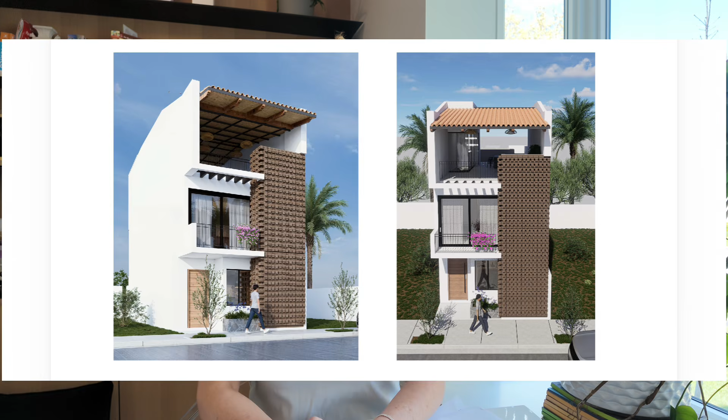What we're building is going to be a house. It is 2 stories plus a rooftop. In the 2 stories, we're hopeful for 3 bedrooms, and then on the rooftop we'd have a small dipping pool, kitchen, and a lounge area.

Because of the size of the lot and the configuration, the staircase had to be carefully placed in order to, one, fit the rise and the run, but also to incorporate a swimming pool.

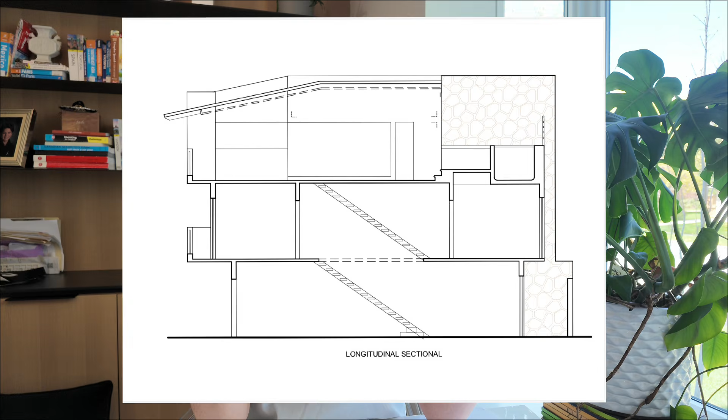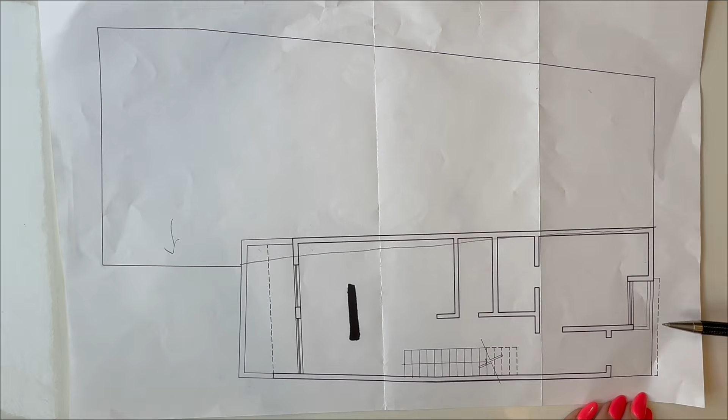Our limitations are light from the front and light from the back. So you have sun in the morning on the front - your front patio here would have sun - and then as the day progresses, you're going to have sun that comes here, and you're going to have a beautiful sunset in the evening.

Here we are on the ground floor. We have our entrance here, this is our sidewalk. What I like about this entrance is that it's not directly on the sidewalk, it's off of the sidewalk, so you'll have an overhead here. Then coming into the hallway, there is the staircase, but in order to get up the staircase, you're actually going to come up this way.

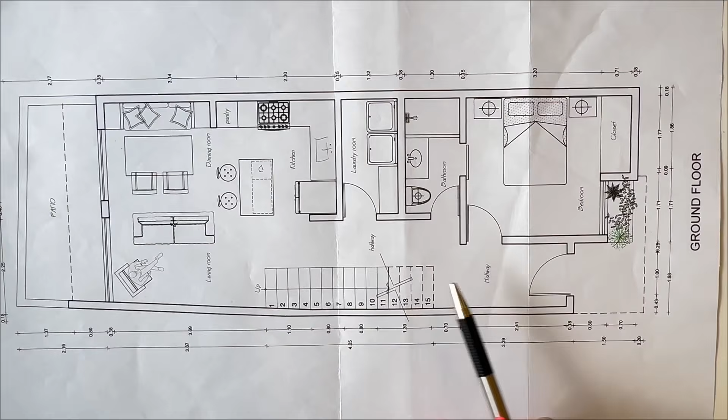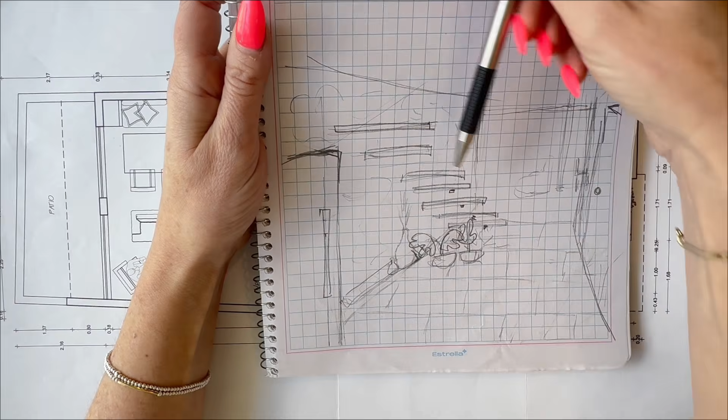So you see the back of the staircase, which we're planning on having as an open tread staircase. I have a little mock-up of this hallway I'll share - I'm not an artist, although I love to pretend that I am. This is the door opening, and then we're going to have some nice large tile with small grout lines, a small floating concrete bench for setting vases or plant life on, with integrated LED lights that come from the top of the floating staircase.

It would have a stringer just for support and also safety, but integrated electrical so that the lights can shine down onto the plant life here. There's a wall that comes out, so once you get beyond the staircase, there's a little bit more space to get into the apartment. I think this is a nice welcoming look.

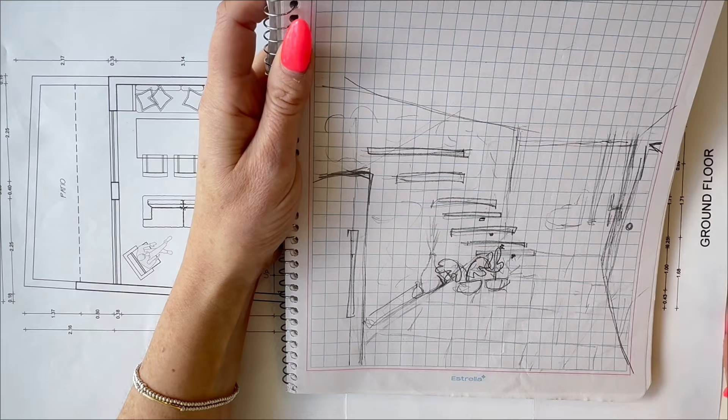We're going to go into this room here, which we've labeled bedroom. For resale value, I think having a third bedroom is valuable, but how we might use this space, we would have it as more of an office with a Murphy bed. So that bed would be attached into the wall and could come down in whatever size. I think this is a queen size that could fit, maybe it's a double. Maybe I would have a desk here that has a nice view out the window.

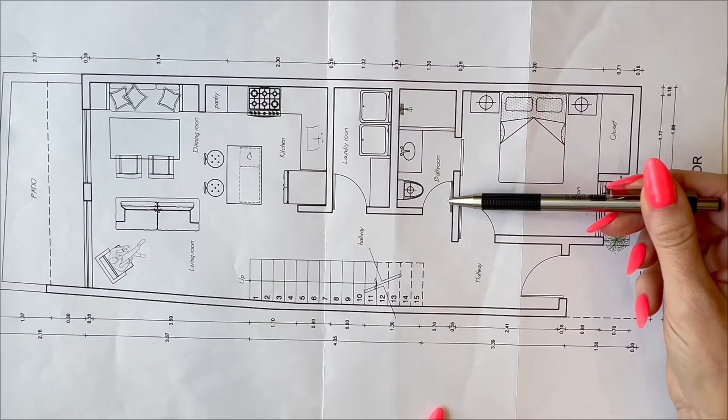But also really accessible to come and go as we build the next property or whatever project it is that I'm working on. So we've added a cheater door here, but made this into a sliding door. I think that will work nicely for the entire floor, but also feel somewhat private if there are guests staying here. I like the size of this bathroom, but I think that's a perfectly useful bathroom, nice vanity size.

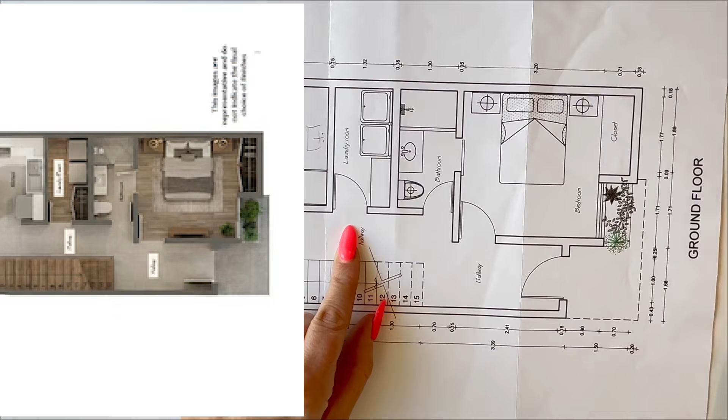You have a nice closet here. I think that's a really good closet size. So then when you're coming out, you'll see that the space under the stairs goes out, so you have more space to go around the stairs. Our laundry area we wanted to have on the ground floor here, a regular sized washer and dryer, and then some storage.

So if we walk more in here, we have the kitchen, dining, and living room, and two full size, as large as we can get into the space, sliding doors. Because we need as much light coming into the space, you're going to have late afternoon sun. It will be lovely to sit out on this patio out here, which we'll get to.

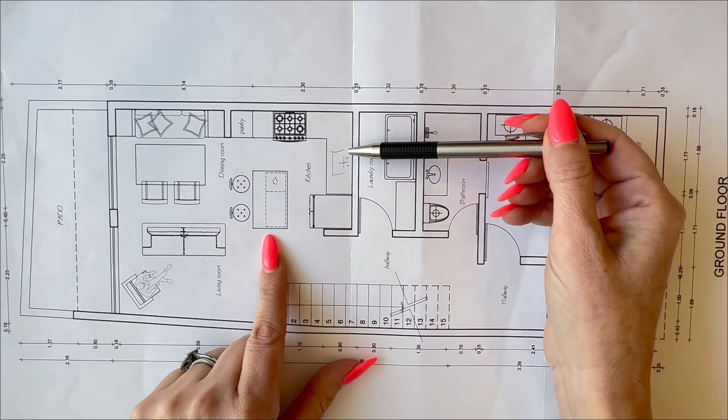So the kitchen, I think, is small but mighty. So we have an island. Most likely the sink will be here, the dishwasher here, fridge, stove, pantry, and then this will be cabinetry, a sitting space for at least two, possibly more. And then we go into the dining area, a tight space to be able to fit potentially six people.

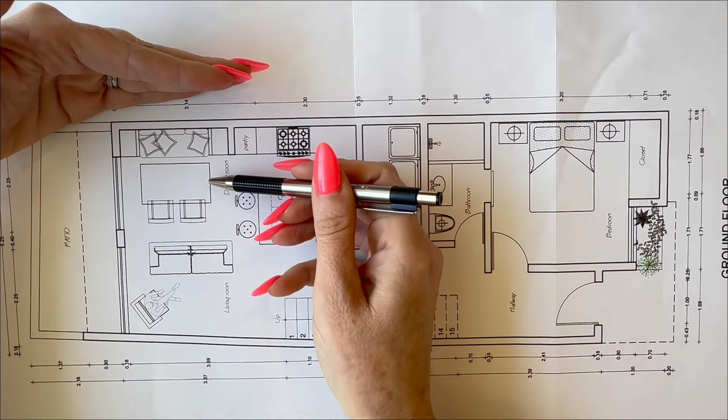What I've suggested is a banquette, so that pushes the space out so that you can have more room for the chairs and the table. So it just gives you a little bit more square feet. So you'd move that space over, which gives you then more space into the living room, and I'll show you what I've come up with.

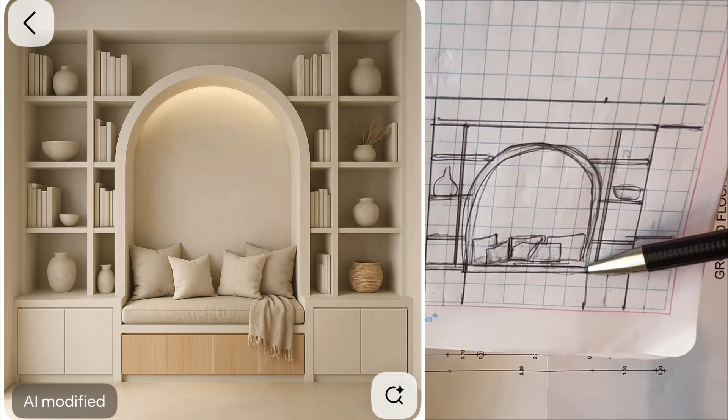I like this inset rounded arch. This is the banquette with a pillow on the seat, but also nice pillow features. This would double as also shelving. I'm a really big fan of decorating with items that are also useful. Things like a salad bowl that wouldn't fit in a cupboard, you would put on the shelving, or a vase that you would take off the counter and actually put your flowers in when you have fresh cut flowers.

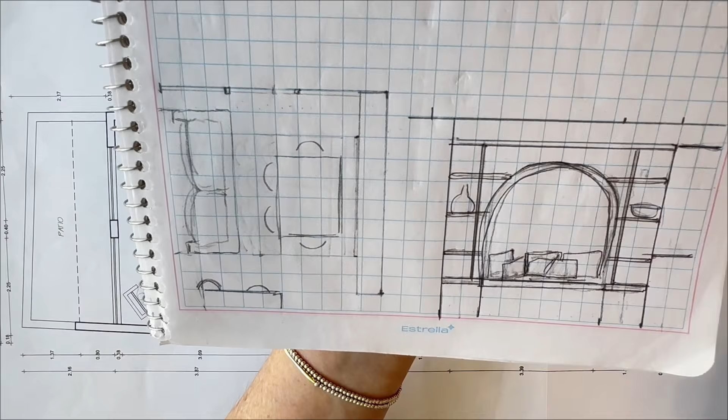This brings the table over, which then gives you more walking space between your couch and your island. This pinch point becomes a little bit better. In the living room, most likely the TV will be on this wall, attached to the wall somehow, some way.

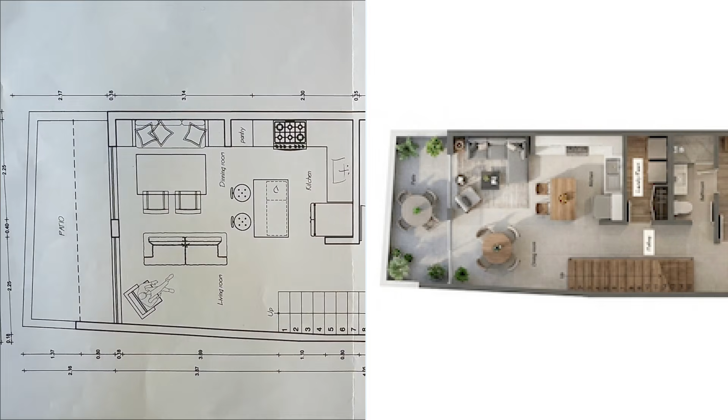So then we're going to be opening up these doors wide, where you're going to have a nice breeze coming in, that later day sun. And this terrace is going to be absolutely beautiful. The plan here is to try and incorporate a water feature, some brick interlock that comes out, a nice seating area, and it's just going to be quiet, serene.

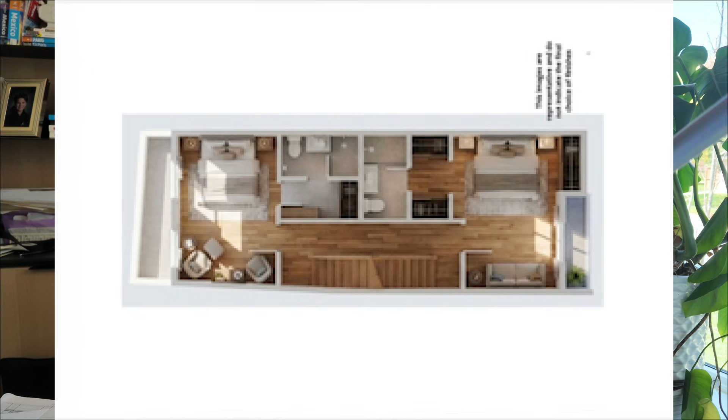Let's go to the second floor. From the ground level, you're going to be coming up this way. I'm thinking that this is going to be my primary suite, and here's why. Tell me in the comments if you think the back unit should be the primary suite or the front.

We go into the bedroom here. I'm a TV in bed kind of person, so this wall has to have a TV. There's a very large sliding door, and then this is a patio. I'm a slow kind of morning person, especially in Mexico, and I want to be able to have my coffee on that patio with the sunlight coming in.

There's a closet space here, in the nook of the front, so you have extra closet space that could just be locked. You have the bedroom with the integrated side tables, which I'll show you, and closets on both sides, so it's a walk-through. You could have access to the entire closet, or you could have an entire side of that just locked completely with your things in it, which is most likely how we will be doing it, keeping things down there.

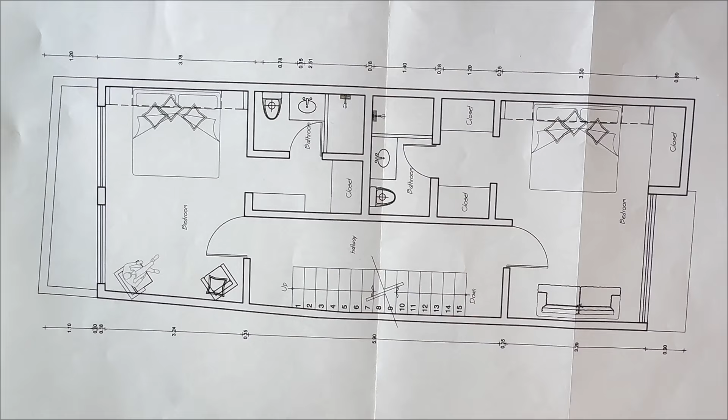The bathroom is about the same size as the one downstairs, slightly bigger. The vanity is going to have to do double duty, where it has a lockable space but also quite a bit of storage, because you need to fit towels, toiletry items, hair dryers, all that stuff.

We'll go into this design here. If you remember the banquette from downstairs, I have the same feel for the bedroom, so you have a rounded arch with an integrated headboard and side tables. The floating side tables, I think, work better than having drawers here. I like the idea of it being open so you can vacuum and clean nicely under it, and you have just what you need on top.

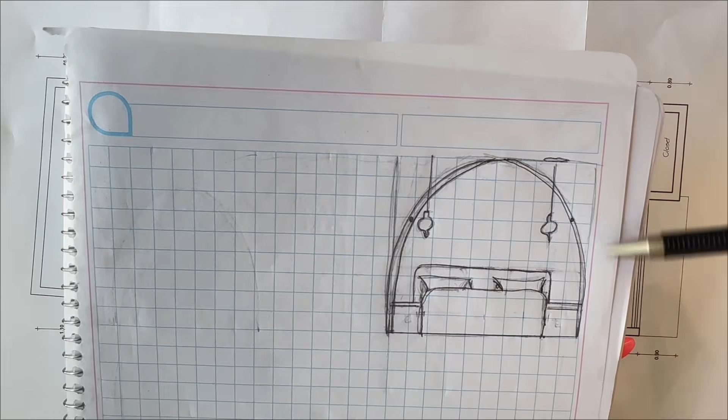Because this is an integrated arch, I'd like to see if we can add electrical pot lights with a light switch down here so it could be a reading light. These more decorative ones are beautiful, antique-looking glass blown lights. That gives you a little more space in a small area that you're building it into, without adding large, big furniture into the room.

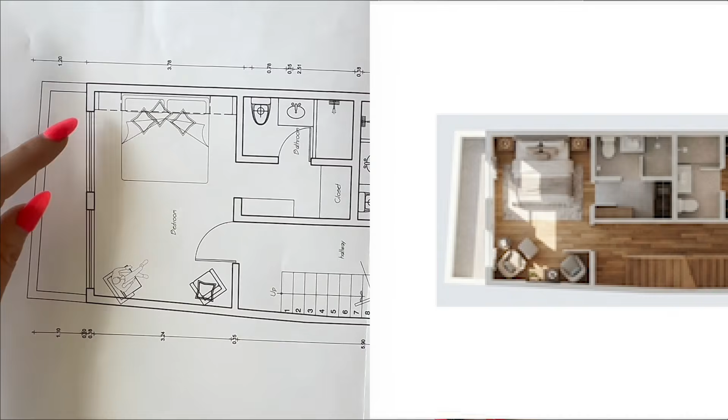So we're going to come out, walk down this hallway, and see the other primary suite, okay? Tell me which one you like better. You'd have your TV on here. You do have more doors, so you'll have two large sliding doors, unless one of them is fixed to save on cost—that's definitely a possibility also.

This is not a patio, so this would be a Juliet balcony that would look down into the terrace. Do you remember that terrace, the ground below? Beautiful, serene patio—that's what you would be looking at down below.

And then you have a closet and bathroom here with lots of closet space, and also approximately the same size bathroom. Here's why I think I might end up with this room as my primary and not the other one: it would have later light in the day, and typically I'm up at the pool, or working, or out, but perhaps it's quieter here. This neighborhood is very quiet, but of course you do have some noise—street noise, people walking, cats and dogs and roosters and chickens and all that stuff that can bother you.

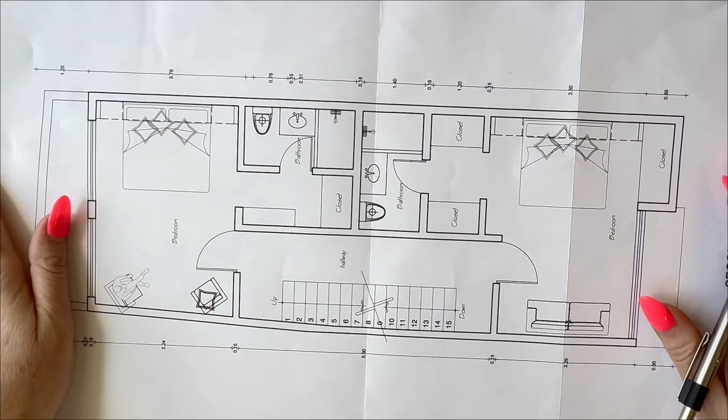So will the back side be more quiet? Is that something you're going to want to have? I wonder—one or two? Which one are you moving into?

Okay, here we are on the roof. We are surrounded on all sides, so there's no view with this house. The benefit of this house is that you're getting everything you'd want in a 3-bedroom condo, but it's your own—you get your own private pool, your own private rooftop, without an HOA to tell you what to do. You have control of your own expenses, your own privacy, and you're in the best neighborhood, in my opinion, in the entire world.

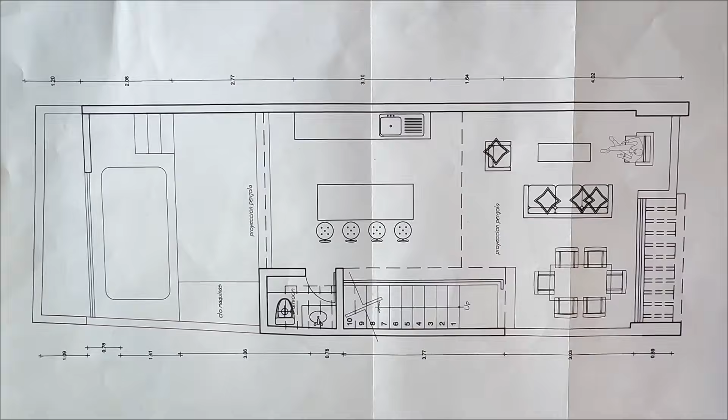So you're going to come up here, and there's a landing, and then there's a door. I've instructed the architect to change the kitchen to be over here and the island to be over here, leave the dining space, and have the lounge closer to the pool and the pool deck.

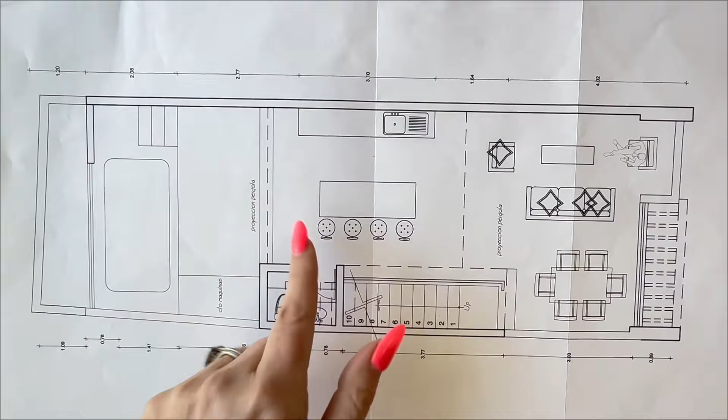Okay, so the top is going to be covered with a roof to here, and then the rest is open. This will be a pool deck that will be 2 stairs up, the kitchen being back here. So this is the roughest sketch you will ever see.

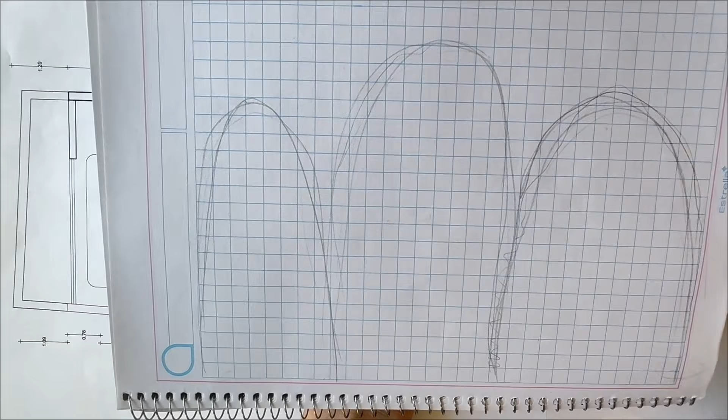Simple, plain. I like the idea of having 3 here behind your kitchen, and either tiled, like a tiled antique looking mirror, something like this, or large cut mirrors that maybe have a tile going along the outside, trimmed in it. This is something that I will work on.

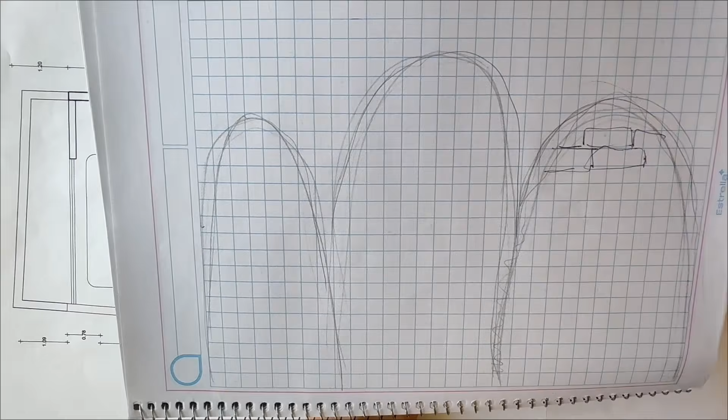So this is the 2-piece that will sit up on the rooftop here, just enough for you to get changed or have a quick wee before you're back in the pool. And then next to here is where the pool equipment would be.

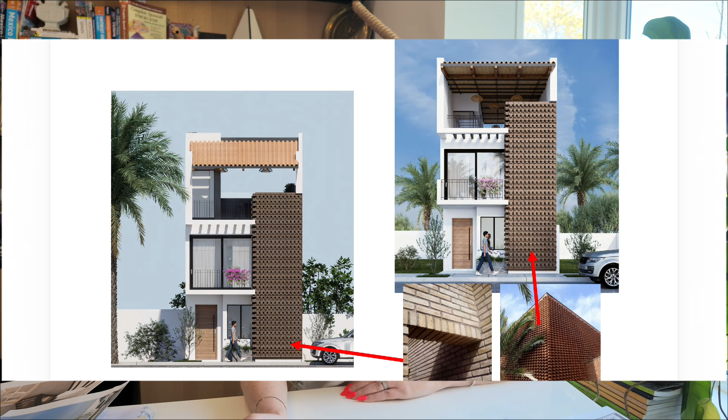That's the tour of the floor plans. Now let's go over the renderings. Here are our beautiful renderings. We would like the color to match the roof tile, but I just think that this is a beautiful representation of keeping true to the aesthetic of the neighborhood, also incorporating the local brick and of course the local tile.

Here you can see the offset of someone walking on the sidewalk and where the front door is located. Oftentimes when you're walking in Puerto Vallarta, you will see a door right on the sidewalk. Here it's shaded. If it's raining, you're covered.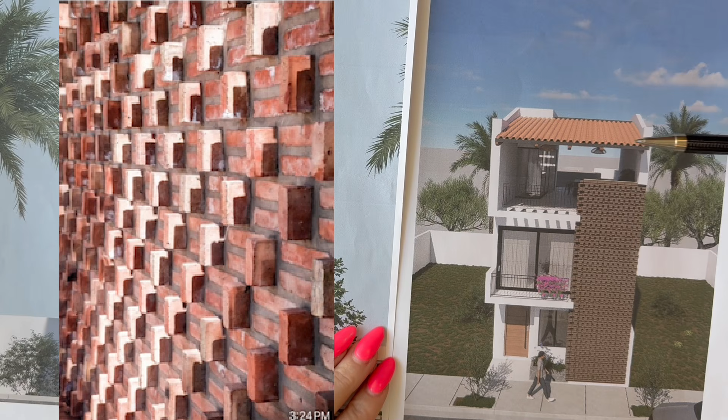This is a brick style pattern. I want that same brick to match the tile as close as possible with the lighter blonde, less red color. So I want to keep the traditional colors of the neighborhood, but bring that sort of modern twist into the hacienda style.

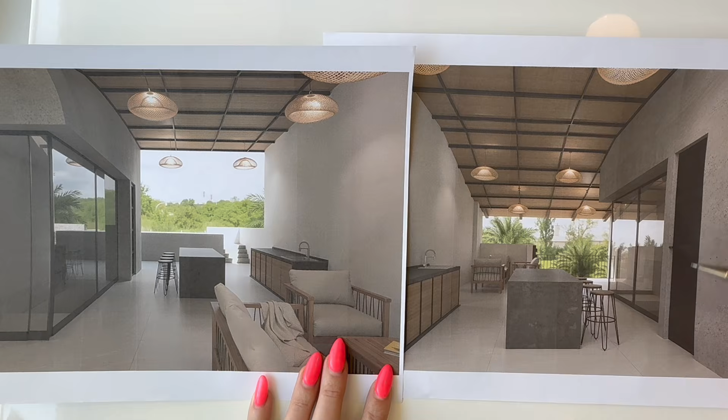Here's our rooftop, and it gives you a little bit better perspective of why I want to move the 2 rooms, the kitchen and the living room. The more time used would be lounging near the pool, so it would be a little bit more cozy in this area.

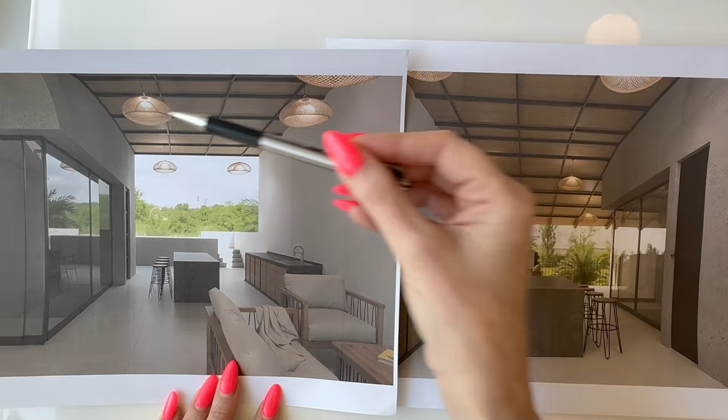And I do like the lights that they're implying with the renderings, but I would use them in more of a clustered artistic manner over top of a seating area. You don't have that height definition with the actual plans, because what I had them change is that you're actually going to, before the pool, walk up onto a deck, 2 stairs, which then you don't have the full step of getting into the pool.

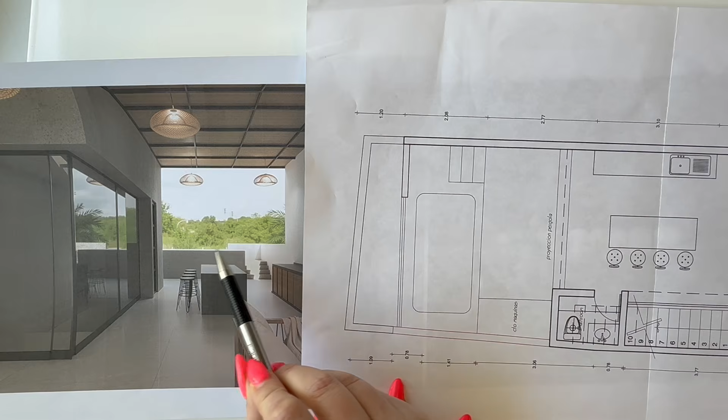Makes that access a little bit nicer. And also visually, I think that walking up here where you can then see into the pool would be nicer.

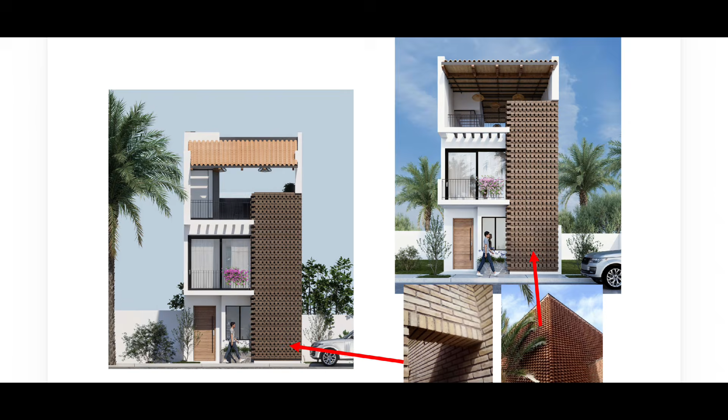Building in Mexico as a Canadian is not simple. There's a lot of barriers. There's that you're a foreigner and the foreign exchange, language, which I am actively working on, and so is my family. The permit approval process is definitely a challenge also. It does take time.

The construction methods are going to be completely different. This will be brand new for me, a complete concrete building. The other thing that I'm worried about, but I'm told by my contractor not to worry about because they do it every day, all day, is building into a mountain, in a part of the world that can experience hurricanes and other natural disasters.

Once we have those 2 permits in place, then hopefully it's go time. But again, this is all new to me, so every step of the way I will try to update and bring you along and make it as beautiful and as enjoyable as possible, because also part of this process is me learning to create the content.